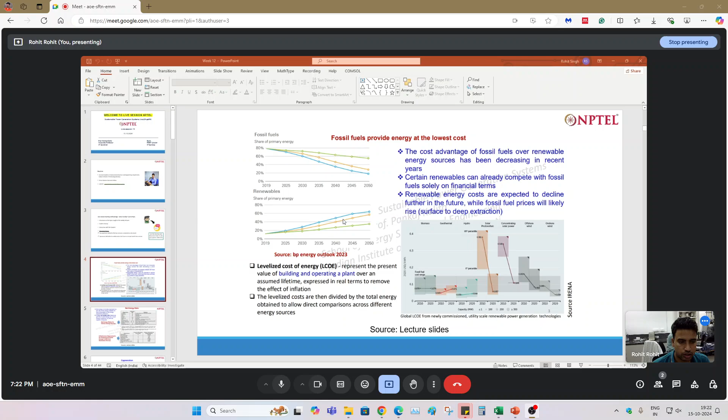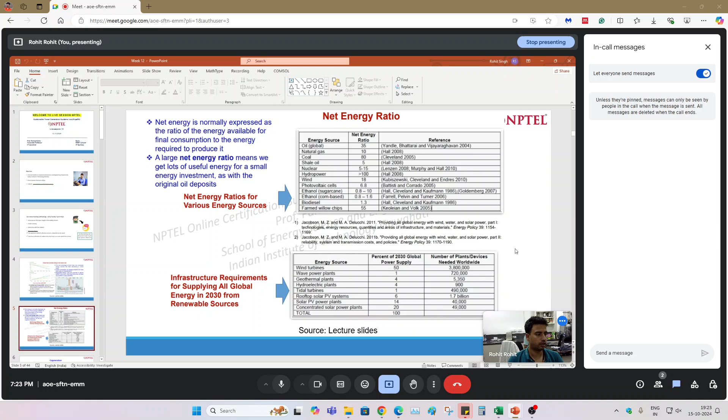Now there is net energy ratio. Net energy ratio normally expresses the ratio of the energy available for final consumption to the energy required to produce it. Okay, so net energy is a ratio of energy available for the final consumer to the energy required to produce it. So a large net energy ratio means we get a lot of useful energy for a small energy investment.

So if we check net energy ratios for different sources, oil is 35, coal is 80, hydropower greater than 100. And you can see photovoltaic cell at 6.8. Okay. So there are different things.

Cogeneration. If you see, generating electricity using two different processes, two different cycles or two different power plants combined together, like a steam turbine cycle and a gas turbine cycle clubbed together, that was combined cycle. Sorry, cogeneration is basically when you are producing power and thermal energy, power and heat, using the same fuel.

So how is it done? You have a boiler and then a turbine, and whatever electricity is generated is given through the generator. Steam, even after passing through the turbine, has a good amount of enthalpy, so that can be utilized in some process heat application, like the textile industry, which uses steam as a cleaning agent, and the automobile industry also. So there are a lot of applications for heated steam.

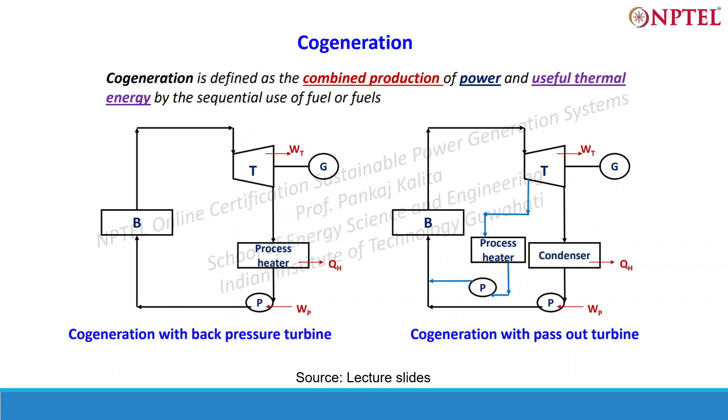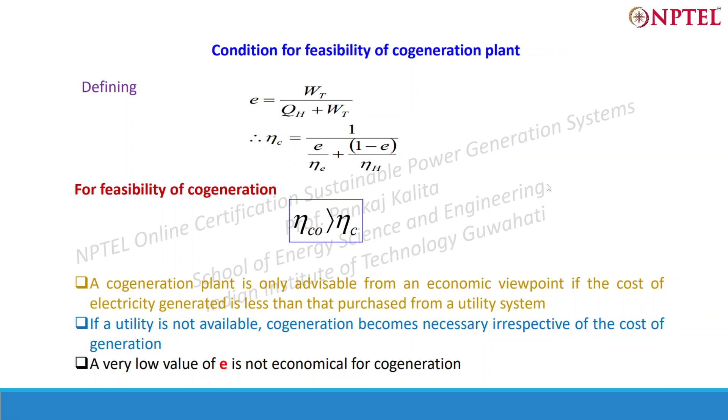Now we are actually moving into the economic portion, like techno-economic analysis of the whole system. So economics is governed by the rule of demand and supply. This is the rule of free market. So if there is no interference and if supply drops with respect to demand, price is going to rise. Simple thing. So let's take the price of onions or tomatoes in the market.

So if there is a demand of onions and tomatoes in the market and supply is dropping, then whatever is left in the market will be sold at a higher price. So this is kind of a supply demand gap, you can say. And if demand exceeds supply, prices will rise. This is simple. So demand has to be controlled to control the price rise. The equilibrium price is at which supply exactly matches the demand. So this is called the equilibrium supply.

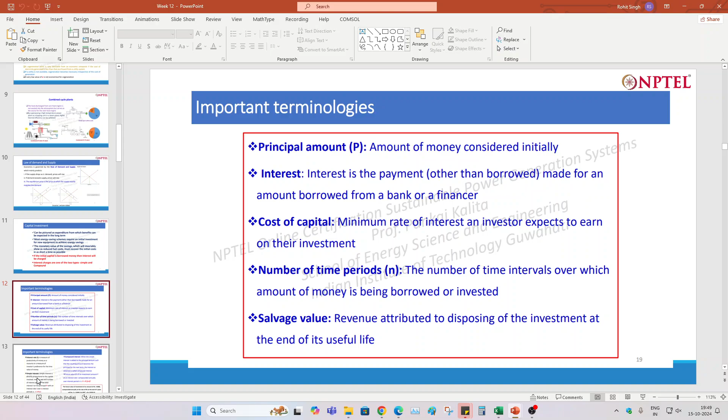Now we have interest rate terminologies like interest rate: a measure of productivity of money as a resource, or measure of investors' preference. So interest rate is kind of an opportunity cost. Okay, so something like you are going to earn money for your principal amount if you have invested in some other place. So a kind of opportunity cost, you can say. So measure of productivity of money as a resource.

Simple interest rate is directly proportional to the capital involved, interest rate, and the number of interest periods. Compound interest is like whatever interest is earned, the next time that interest is added to the principal, and then the next interest is calculated on the updated value.

Now, before going to the payback period and simple payback period, if there are any queries or any terminology which you don't understand, please feel free to ask here. Okay.

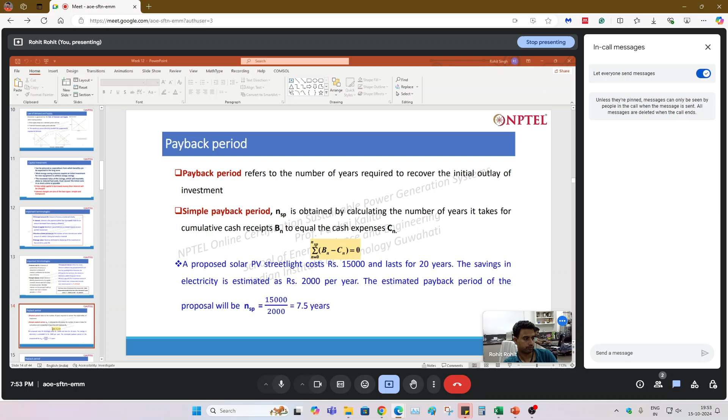Okay, so in case of these heavy capital intensive projects, the payback period is very important: in how much duration of time you are going to get your investment back. Okay, so that is very important.

And then we have discounted payback period. So this accounts for the changing value of money over time, because the reason here of considering discounted payback period is because the 100 rupees value which is today will not be the same value over the time. Over the time the value of the money changes. So this is the criteria taken into account in calculating the discounted payback period.

Okay, so n dp is basically n that satisfies the below equation: (Bn minus Cn) times 1 upon (1 plus i) to the power n is equal to 0. So this has to be satisfied. Now the cash flows for the three projects proposed during their lifetime of 3 years is given below. So calculate the simple payback period and discounted payback period, if the rate of interest is 10%.

So take this question and solve this question. So I will give you some 5 minutes or something. So let's see if you are able to do this question or not. Okay. Okay. Okay, so are you able to solve this question?

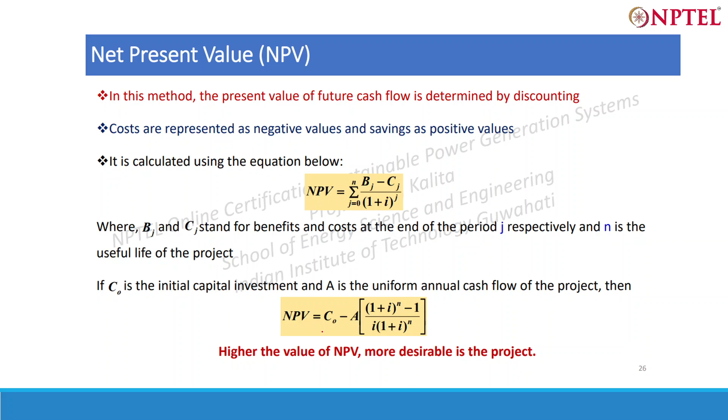So please try to solve this question and see whether you are able to do it or not. So it's simple like the previous question only. Just you have to put your mind and observe what is the present value of the project. So cash flows are given. Okay.

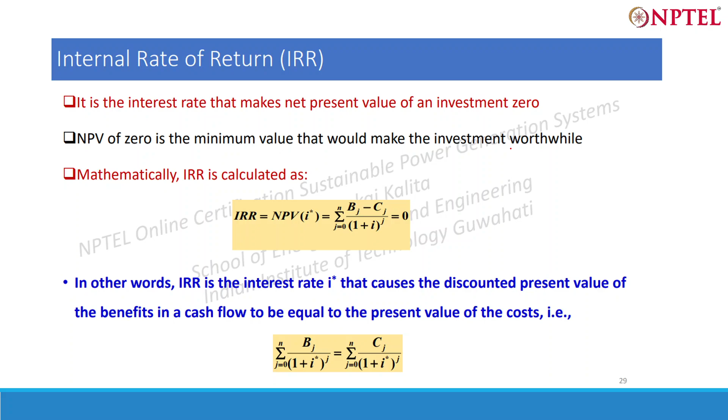In other words, IRR is the interest rate i* that causes the discounted value of the benefits in cash to equal the present value of the costs. So this is a concept which is very much utilized in benefit and cash expenses, which we are going to do in the project. So now depreciation. There are a lot of depreciation methods in the slides also, and the professor has very beautifully taught these different methods.

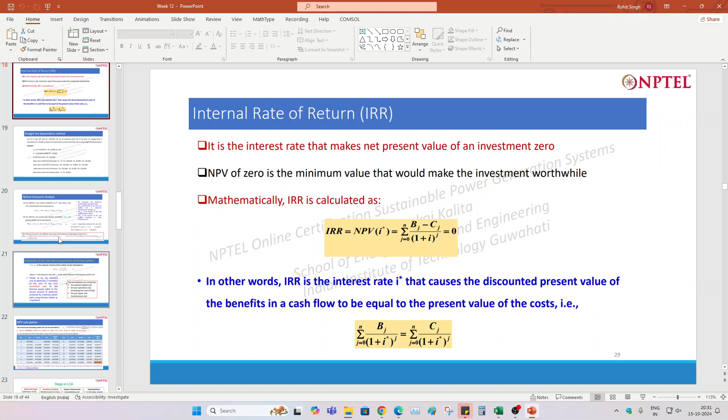Now we were talking about this straight line depreciation method, and then after that, we'll move towards the techno-economic analysis. So whatever we had been studying throughout, this net present value, all these things will be concept integrated into the techno-economic analysis. So in techno-economic analysis basically you have the technical parameters and economic parameters combined.